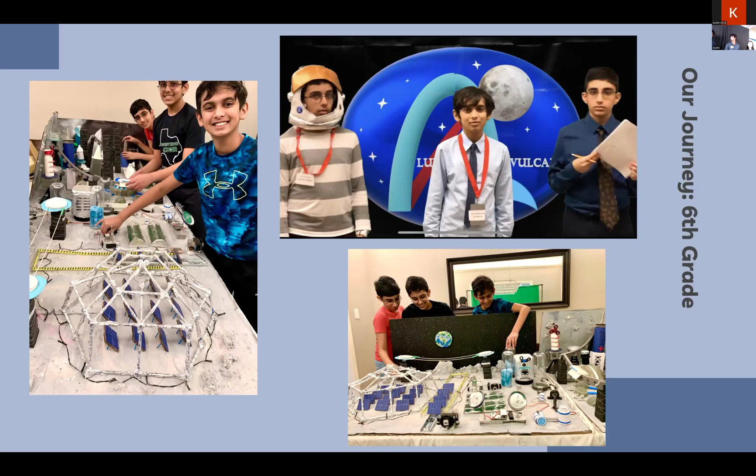When we first heard of the Future City competition, we were excited to realize that the competition involves creativity, engineering, and innovation. Our initial topic was building a futuristic city on the moon, with the project involving creating a project plan, writing a research essay, building a physical model out of recyclable materials, giving an informative presentation and skit on our city, and preparing for a Q&A session.

In our first year as rookies, we made it to nationals and placed 6th. Inspired by our accomplishments in the field of engineering, we continued on for the rest of middle school, working on a variety of topics such as circular economy in 7th grade and climate change in 8th grade.

From our middle school experiences, we learned an immense amount of skills and worked with multiple engineering professionals. Future City taught us about multiple things, including project management, engineering design process, problem solving, as well as helped us develop our research skills, writing skills, public speaking, creativity, innovation, as well as our collaboration and gracious professionalism.

In our 8th grade year, we utilized all of our knowledge and made it to the globals, placing top 5. It was incredible to see and learn from so many teams. Our 8th grade year truly shaped our engineering mindset.

As we were more experienced, we were able to go in depth on topics that really fascinated us, including power generation, energy efficient architecture, food production, health systems, transportation, water desalination, and sewage.

We even followed up that year by giving a TED Talk on climate change, writing in an engineering magazine, and teaching younger teams about our Future City knowledge. As the high school year approached, we were ready to hang our hats up until we realized that a new high school competition was just developed.

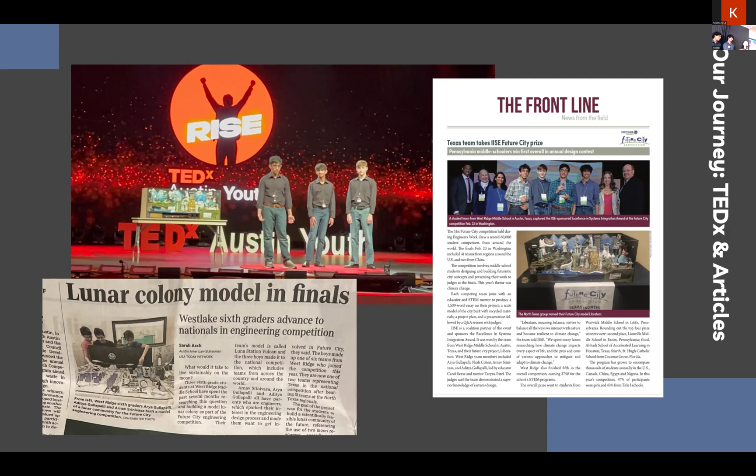Through my middle school years, I also participated in the Future City program, but competing with a different team, and eventually placed in the major competition. This program sparked my passion for engineering and inspired me to explore my interests. I teamed up with Arnav, Aditya, and Arya for the first ever Future City High School program.

We were given the task to research, design, and build the city of the future, but in a completely 3D setting. This past year, our theme was to build a city that runs on sustainable and renewable energy sources and 100% electricity. Our city of Anchor had many futuristic and innovative elements, including a multifaceted program for energy generation with solar panels in space, called the solar system.

This year was a bit different compared to middle school. We were tasked with making a visual VR model showcasing a virtual representation of our city.

One of the biggest challenges we encountered while building the model was that since it was our first year using AR/VR, we didn't have much knowledge about building virtual models, and we didn't have much knowledge about the different platforms that were available.

We had to use problem solving and creative thinking, as well as a structured approach to decide how to formulate our model strategy. We additionally used the engineering design process as a tool to help us come up with our solution. First, we had to identify the problems with different models and come up with a list of certain specifications needed for a successful prototype.

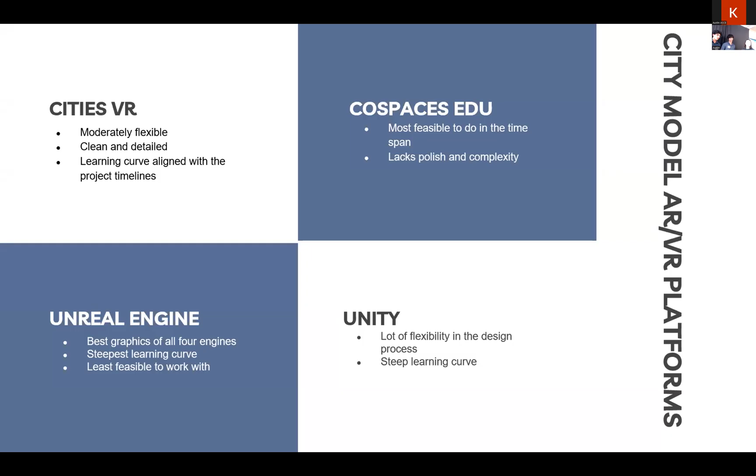We then started to begin designing our model and started with a clean base where we brainstormed our terrain with the goal of encapsulating the idea of our city, which was portrayed in our essay.

We tested out different objects and city structures that could best fit the environment of our location, as well as our electrification solution. After many drafts of testing, improving, and redesigning our city layout, we ended up with the final version.

Yeah, okay. Go on, Shisha.

After tackling the model, our next challenge was the presentation. For this year, we were tasked with displaying our model while giving a 7-minute explanation on the intricacies of our city, followed up by a Q&A session to further detail our city.

We had to record multiple clips using a VR headset and align them with our presentation script. This was also an iterative process of testing, improving, and redesigning.

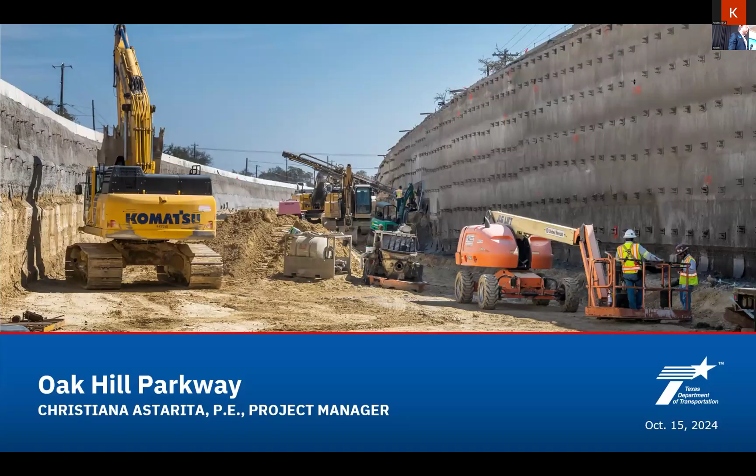In fact, if you go downtown, particularly East Austin, you can look at some of the manholes and the cast iron median covers will actually say Austin Concrete Works. So we have a rich history in Austin and are very proud of the product we've produced over those years. Concrete pipe lasts a long time. I know we're giving a presentation here in a few minutes regarding TxDOT and one of their projects. Our industry has a very rich tradition of partnering with TxDOT. Very proud of all the various projects we've been associated with. Probably the biggest one I've been associated with was 130. That was a very interesting project.

The most unique was the 290 I-35 South Austin interchange. That was an actual project that had a 15 by 15 box culvert that was cast in place. TxDOT didn't believe that you could do a precast 15 by 15 box culvert. Back at the time we were Hanson. We got asked, hey, is this something you could do? We took a look at it, actually made a precast 15 by 15 box culvert, and shaved 3 weeks off their construction project for Martin K. Eby. It was a huge success for TxDOT, huge success for us, huge success for Martin K. Eby. My claim to fame was because of that project, I actually helped get an article written in Engineering News Record, so I'll be signing autographs.

And again, on a personal note, all through my career I've been involved with the Austin branch ASCE. I was involved at the University of Texas and learned about civil engineering for the first time. Back when I started with the Austin branch, man, if we had 2 nickels to rub together, we were rich at the time. And if we had 30 people at a meeting, that was huge.

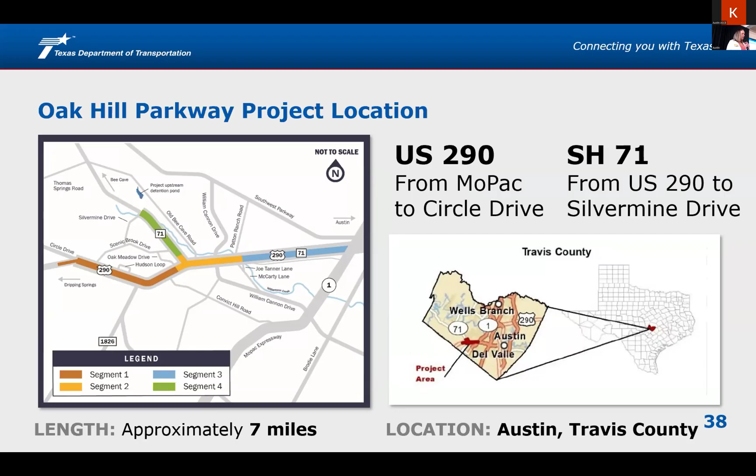The Oak Hill Parkway project is located in Southwest Austin and Travis County. It spans US 290 from Loop 1, or MOPAC, at the east end to Circle Drive at the west end. It also includes SH-71 from US 290 to Silvermine Drive, or Fletcher Lane. Altogether, this project is approximately 7 miles in length.

This project includes approximately 6 miles of roadway improvements along US 290 and 1 mile along SH-71, which includes fully reconstructing the Y interchange and adding 2 new flyovers to connect US 290 and SH-71 in both the eastbound and westbound directions, extending the existing frontage roads, widening the existing US 290 main lanes, building a new overpass for the US 290 main lanes at William Cannon, and reconstructing US 290 main lanes below existing ground level, beginning just east of SH-71, all the way to Circle Drive Southview.

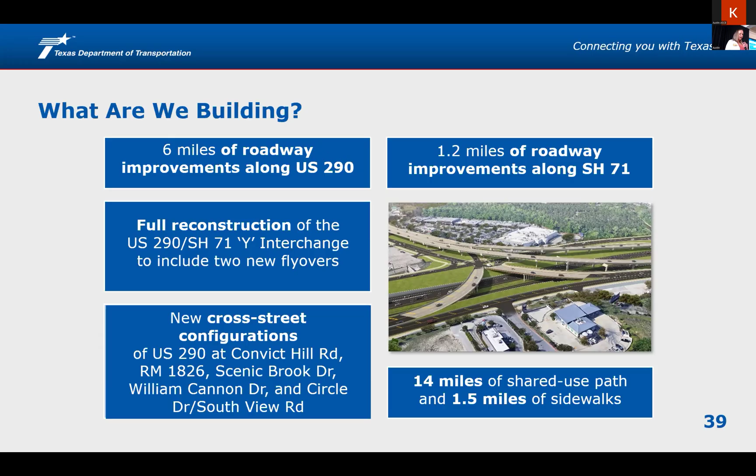We'll also be reconfiguring the cross streets west of SH-71 along US 290 at Convict Hill, RM 1826, Scenic Brook, and Circle Drive or Southview to include grade separated interchanges. Plus we are adding new U-turns along US 290 and SH-71, an off-site stormwater detention pond and dam upstream of Williamson Creek, numerous water quality treatment ponds to treat stormwater runoff, and 14 miles of shared use path and 1.5 miles of sidewalk.

The SUPs, as we call them, shared use paths, will connect with those already built along MOPAC, so that bicyclists and pedestrians will be able to travel from Circle Drive all the way to Barton Springs, Lady Bird Lake, and beyond.

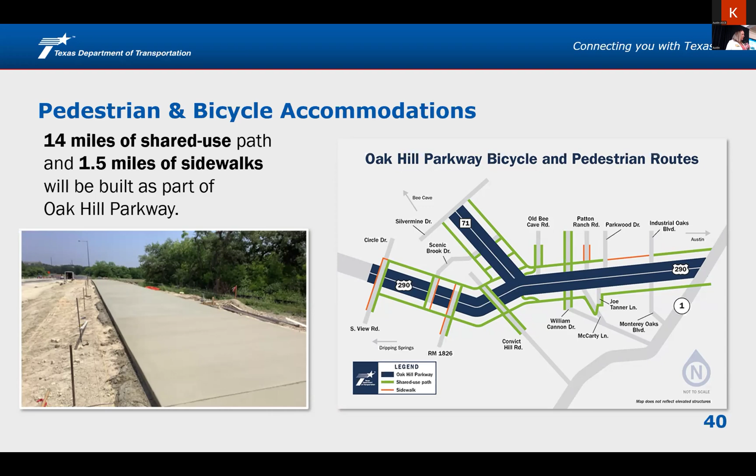Just to give you a little bit of project history, this project is over 30 years in the making. In the early 1980s, the need for a roadway project at the Y in Oak Hill was researched. The original design from the 80s covered US 290 from RM 1826, which is within the current project limits, all the way to FM 973 near the airport. The section between Joe Tanner Lane and Riverside Drive was constructed. However, the portion that makes up the current project was halted due to a combination of funding issues, environmental concerns, state and federal species listing, adjacent land use changes, and especially public input.

During this time, discussions and redesigns were taking place to address the concerns with the project that TxDOT was proposing. TxDOT converted the intersections of US 290 and SH-71, and US 290 and William Cannon Drive, to continuous flow intersections, or CFIs, to improve traffic throughput in the area. The big gap between the DEIS and FEIS is due to folks trying to slow down the project and the need for TxDOT to evaluate different designs.

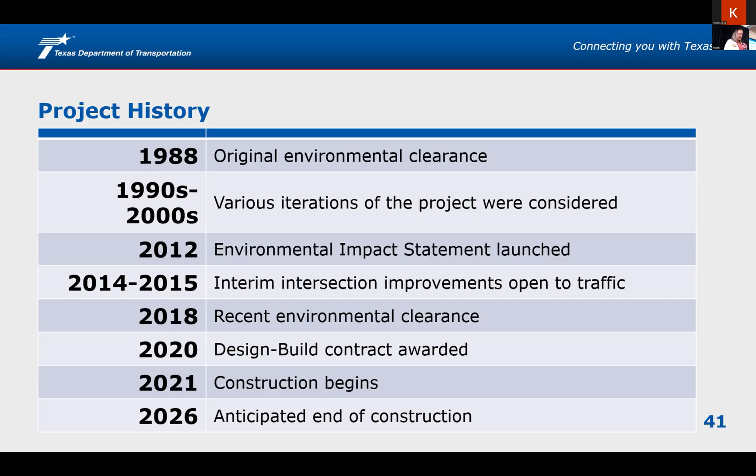And then finally, a design was created that satisfied the majority of concerns, and construction was able to move forward. Construction is anticipated to be completed in mid-2026. Substantial completion date is May of 2026.

The population of Travis County has increased roadway congestion, which has caused a decreased level of service and increase in travel time throughout the US 290 SH-71 corridor. The US 290 SH-71 corridor reached its capacity back in 1995, and the Texas Clear Lanes Initiative exists to address gridlock for Texas drivers statewide, and the Oak Hill Parkway project has been included as a critical project to address congestion.

The Oak Hill Parkway project is, like Austin mentioned, a design build project, and this slide shows you who TxDOT has partnered with. Atkins Realis is our general engineering consultant, or GEC, and they assist TxDOT, myself, and my deputy project manager in the design and construction management oversight of the project.

Atlas, formerly Pavtex, is our owner verification, testing, and inspection firm that performs material sampling, testing, and inspection oversight. Our design build contractor is Colorado River Constructors, or CRC for short. It's a joint venture comprised of two very experienced design build firms: Fluor Enterprises and Balfour Beatty Infrastructure. AECOM is the design engineering firm they contracted for the design. As you can tell, if you've driven out that way, we're quite past the design phase. We're well into construction, over halfway through now. And lastly, Robert Kistner performs independent quality assurance and works on behalf of both TxDOT and the contractor.

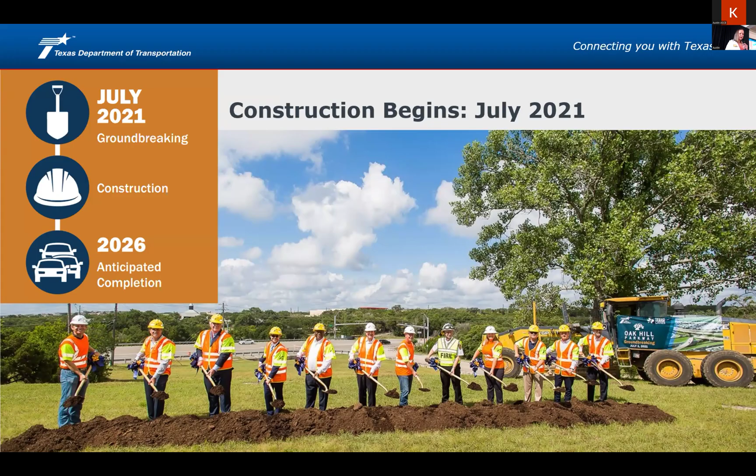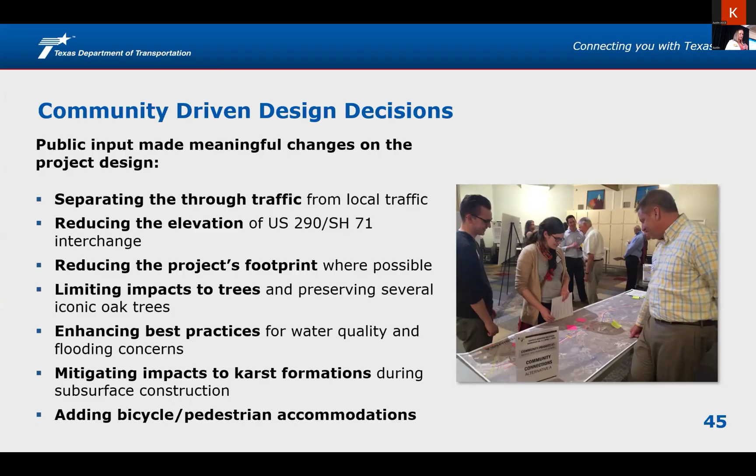The original design of the Oak Hill Parkway project changed from a typical freeway design to what is currently being constructed. Public input provided meaningful changes to the project design, such as separation of through traffic from local traffic, reducing the elevation of the US 290/SH 71 interchange, reducing the project's footprint where possible, limiting impacts to trees and preserving several iconic oaks, enhancing best practices for water quality and flooding concerns, mitigating impacts to karst formations during subsurface construction, and of course adding bicycle and pedestrian accommodations.

Now let's look at some of the features of this project that make it so interesting.

So here you can see a nice list. CRC is responsible for protecting and preserving a specific group of iconic trees near the William Cannon intersection, as well as multiple trees in what TxDOT identified as tree preservation areas. In addition, we got the contractor to commit to preserving additional trees that were not going to be in conflict with their final design.

The project boundaries include portions of the Edwards Aquifer contributing zone and recharge zone. It's a very unique area. This means karst features are present, and this requires TCEQ coordination to mitigate those voids in the limestone.

We have Williamson Creek, which crosses the project in four locations: at SH 71, Old Bee Caves Road, William Cannon, and US 290. With the completion of our project, Williamson Creek will run parallel to and in between the US 290 eastbound and westbound main lanes in that area from SH 71 to William Cannon.

TxDOT also acquired all right-of-way rather than turning it over to the contractor, as was typically done in design build projects. We decided to take on this risk ourselves, and we had possession of all new parcels months ahead of construction.

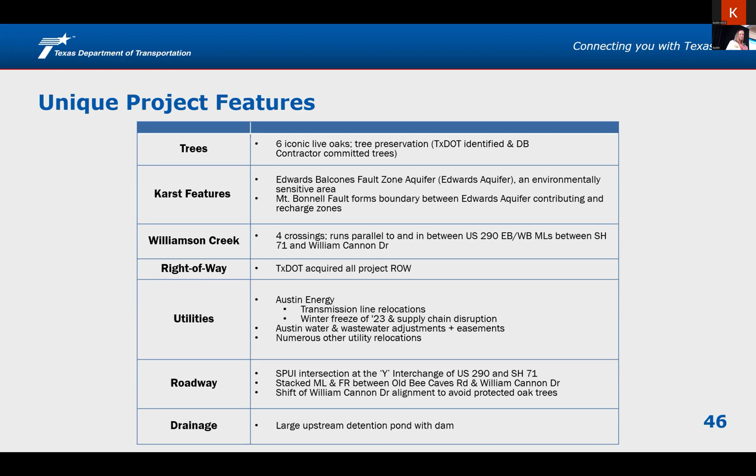Flooding storage will be provided at a large upstream, offsite detention pond. I'm told it's only TxDOT's second dam added to their system, so it's a pretty cool feature.

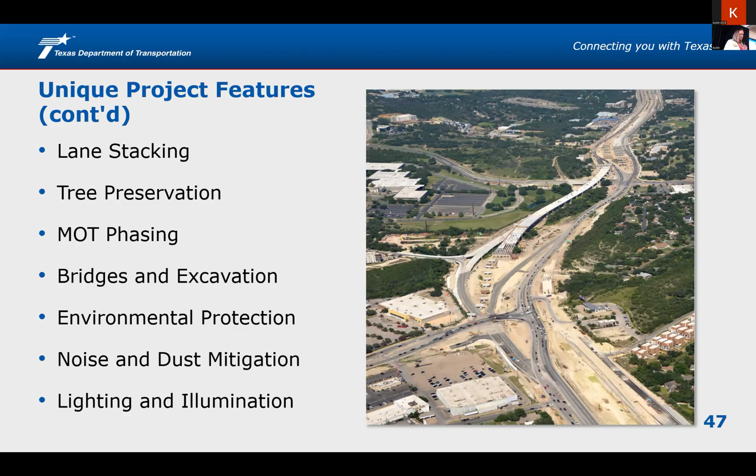Here are some additional project features, and I'll touch on some of the concerns from the past and how they were addressed. You can see we've got lane stacking, tree preservation, maintenance of traffic phasing, lots of bridges and excavation, environmental protection, and noise and dust mitigation is huge—keeping the public happy—along with lighting and illumination.

Lane stacking was used to reduce the footprint of the roadway between William Cannon and Old Bee Caves Road by stacking the main lanes and frontage road. In this stretch, the available width is restricted by the cliff face to the south, Williamson Creek in the middle, and private property, the NXP facility, to the north, which also has a pond bordering the area.

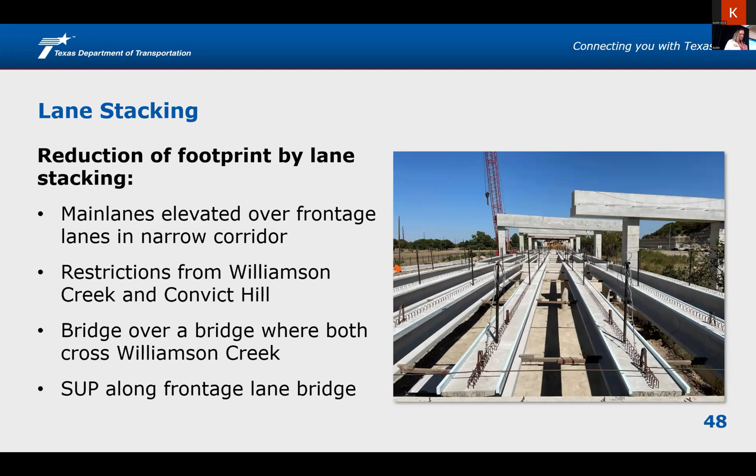We intend to preserve the oaks in Oak Hill, including the iconic oaks, through tree preservation areas designed into the construction plans. Over 300 trees are being maintained on the project. A dedicated staff arborist has been active during construction since procurement, allowing awareness and a relationship with the trees in our corridor and providing a better rate of success with conservation efforts. There are some pretty steep liquidated damages associated with those iconic trees.

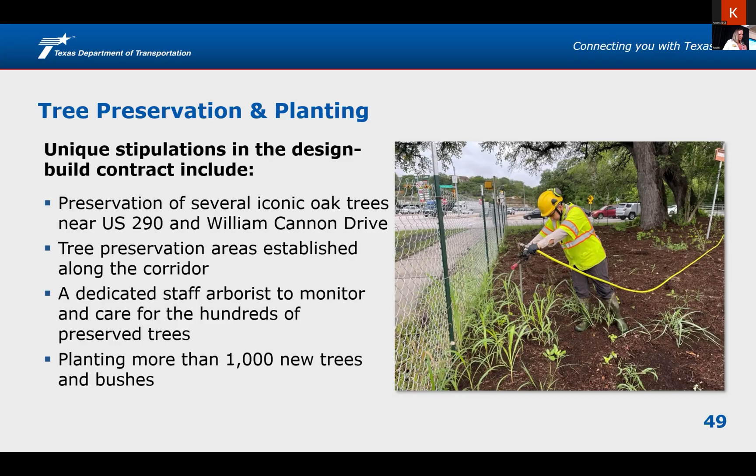There are 6 iconic trees near William Cannon that have been incorporated into the design, and they've been given names by the community. The 3 Nieces are right at William Cannon, along with the Grandmother, the Grandfather, and the Beckett Grove Oak, also known as the Taco Bell tree, which was relocated from across the corner where a Taco Bell used to be.

These trees were identified early on to allow the team to consider how best to construct the project around them, such as the distance needed to preserve their canopies and root systems. In the case of William Cannon, we shifted the roadway around the trees instead of removing them.

Roll plots have traditionally been hard to use in the field, having to roll up the printed versions and hope they don't blow away. With the incorporation of iPads and other digital viewing devices, viewing larger sheets is easier out in the field.

Layering of phased construction in digital files, such as with the traffic control plan, allows for faster comparative evaluation of the phases, which can lead to schedule gains. There's also less chance for critical information to be hidden by repetitive information on each separate sheet or obscured by cut lines. Going a step further, the plans can be exported into GIS and viewed on a GIS viewer on a digital device.

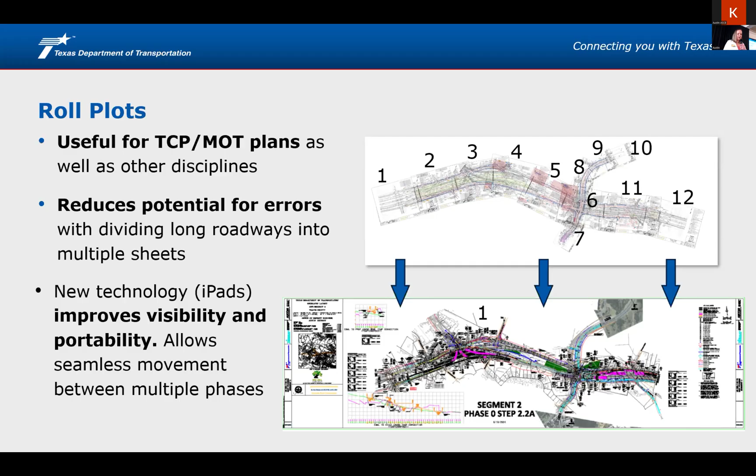Going a little further into TCPs, here's the intersection of US 290 and William Cannon. You can see the iconic oaks indicated in the image here. Now let's see how we move the roadways around them.

One of our mandates for construction is to keep 2 lanes of traffic open in all directions at all the major intersections. Lane shifts and partial closures were used to move traffic around while the roadway transformed from its original configuration into the current configuration. We've done this successfully by using detailed TCPs for each phase of construction.

These are also referred to as maintenance of traffic, or MOT, sheets. In this image, and a view to follow, the green lanes indicate new roadway and pink indicates new bridge work, in this case the new William Cannon Bridge and future 290 westbound main lane bridge. So we started by working around the existing roadways.

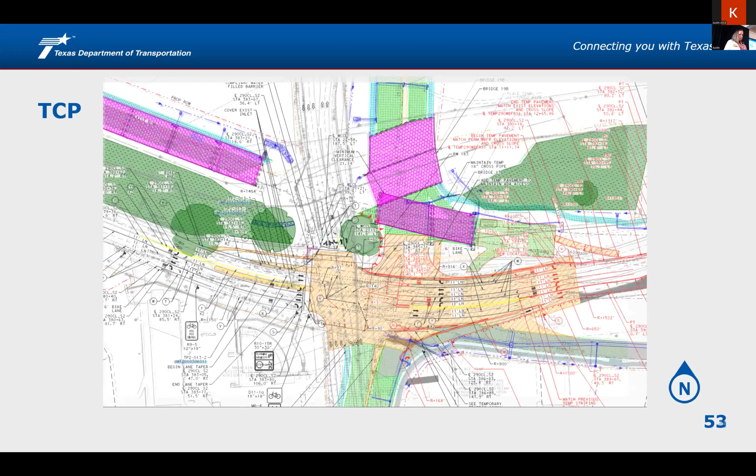Here the orange shows temporary pavement we used to build up the intersection prior to shifting onto the new alignment. Once the new alignment was ready, we shifted traffic onto the newly constructed roadway and began demolition of the old alignment. The switch allowed us to build the rest of the bridge work while allowing traffic to flow.

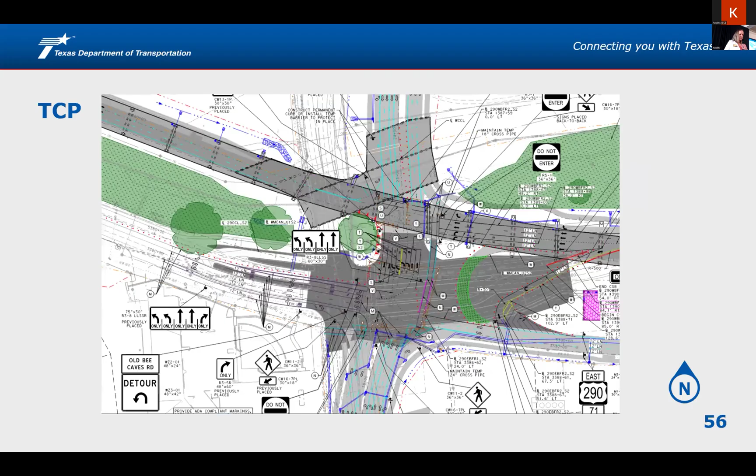The eastbound main lane bridge still needs to be constructed to the south, but you can see all the different phases we have to go through to move traffic around in order to build the project. If you'd like to see the physical representation of the plans we just looked at, here are those same steps seen from above, showing the progression from December 2022 all the way to just a couple of months ago.

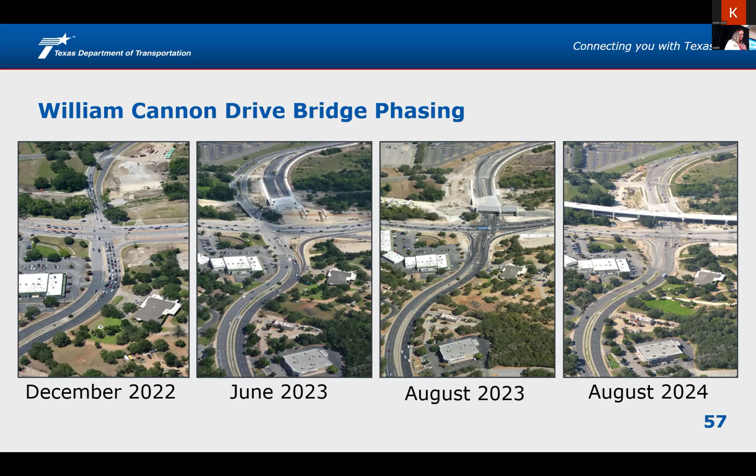So 26 bridges on the project. On the east side of the project, there are bridge widenings of US 290 over existing crossings at Old Fredericksburg Road or Harper Park Drive and Monterey Oaks, Industrial Oaks Boulevard. And that's to increase highway capacity for everything we're adding to the west.

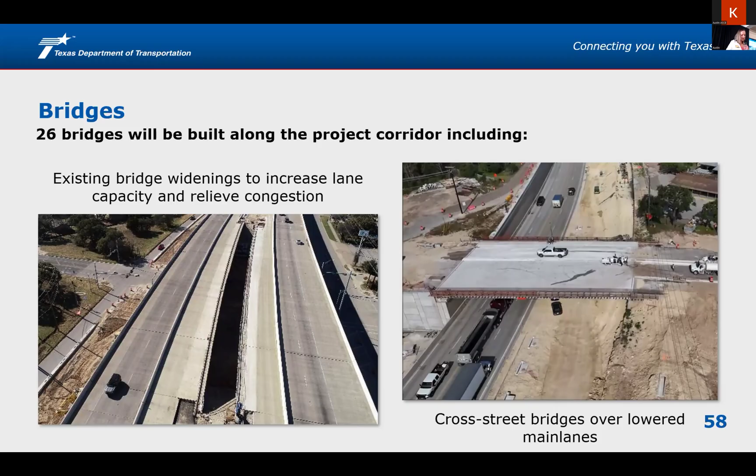And then on the west side of our project, we have bridges for the cross streets that used to be signalized intersections with US 290. So the picture on the left is at the east end of the project, bridge widening, and the picture on the right is at the very west end of the project.

In the center of our project, we have unique bridge configurations for westbound US 290 frontage road at William Cannon, like I've already kind of spoken about. Also at Old Bee Caves Road, and then there's bridges over these bridges for the westbound US 290 main lanes.

So on the left, like I mentioned earlier, this is the new westbound frontage road that opened up a few months ago. And what's on top is going to be that new westbound main lanes going over top. Something similar will be on for eastbound traffic on the south side of Williamson Creek, not as long of a distance, but you'll still have this effect.

And then on the right, the construction crews performed a triple crane pick during construction for the main lanes bridge, using 3 cranes in unison to lift that really heavy rebar cage into place.

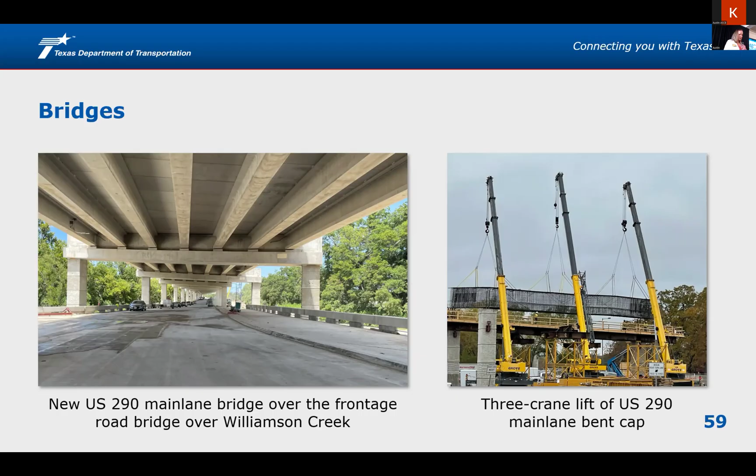There's been a lot of wall construction, especially as of lately now with a lot of utilities moved out of the way. Every type from retaining wall to support the new lowered main lanes and frontage roads to sound walls, which help mitigate noise for the neighborhoods along US 290. Some walls are built out by our crews, others are prefabricated elsewhere and installed on site. Retaining walls are used throughout the project when we need to either raise or lower the roadway.

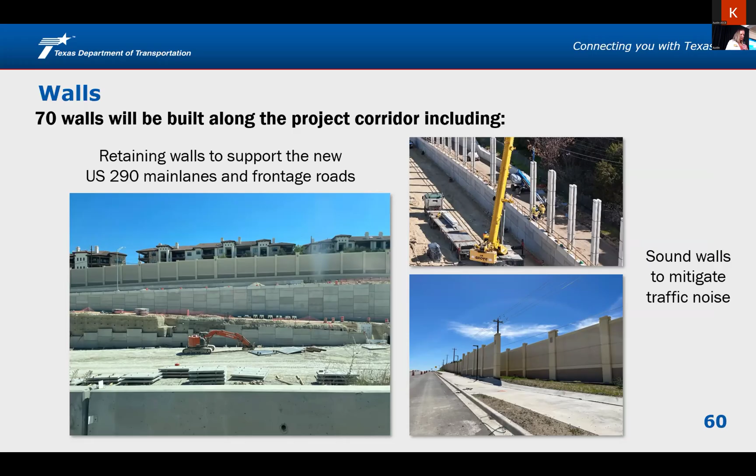So the photo on the left-hand side is right outside the project office, and there's several walls here. You can see the sound wall at the very top in front of those apartment buildings. Then we got a cast-in-place wall, a soil nail wall, and this is going to be a ramp here, going up to meet the new crossover bridges at 71, the interchange. And you can see the crews, how they install those sound wall panels.

The US 290 main lanes on the east side of the corridor transition from an elevated highway with bridges to a lowered one under the cross street bridges to the west. We are using large milling machines to remove 2 million cubic yards of material to excavate for those lowered main lanes. Just a fun fact, if we stack that on a city block in downtown Austin, we would have a 60-story tower of stone. So it's an enormous amount of earth movement.

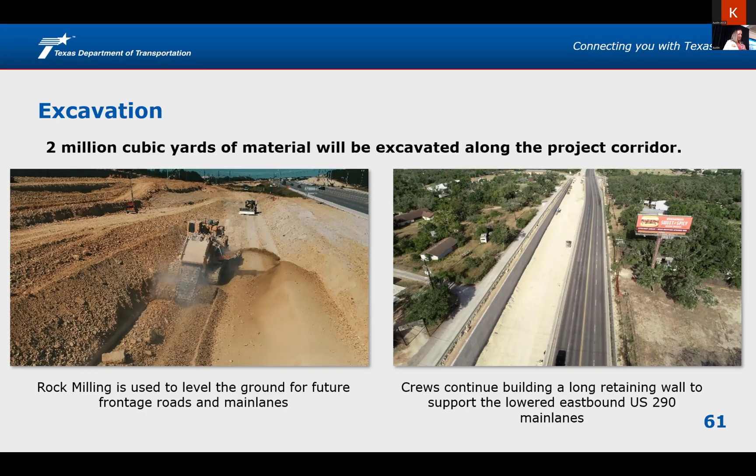So why are we elevating US 290 in the east and lowering it in the west? Well, no pun intended, it's Balcones fault. The fault line runs along the border of the recharge and contributing zones of the Edwards Aquifer. We are excavating in the contributing zone, which is comprised of hardened rock layers, and precipitation sheet flows over the surface. Near the fault line, rainwater enters the recharge zone where it rapidly drains into the aquifer, which is why we are keeping as much roadway structure above ground as possible.

In that recharge zone, there are karst formations, which are one of the key environmental concerns organizations like Save Our Springs Coalition had about the original project. The Edwards Aquifer is an environmentally sensitive area that supplies drinking water to residents of the area, and is also home to endangered species like the blind salamander.

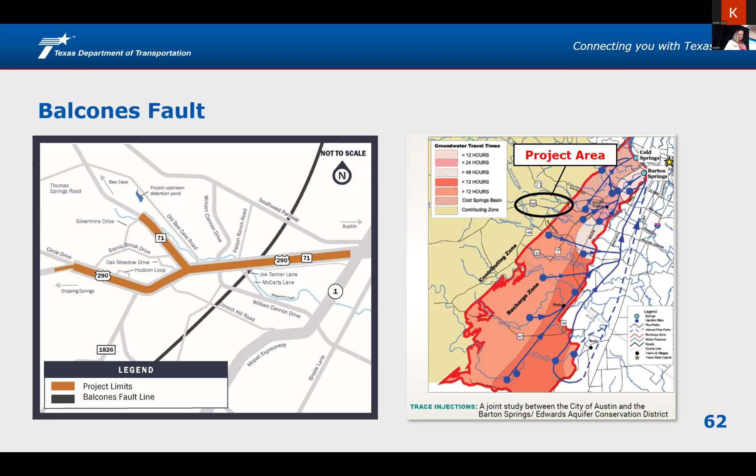The milling machine—we have, I think, four of these milling machines on site, and they're just going nonstop. Really pretty cool to see up close. And they go really slow, but they turn out a lot of cutting through the rock.

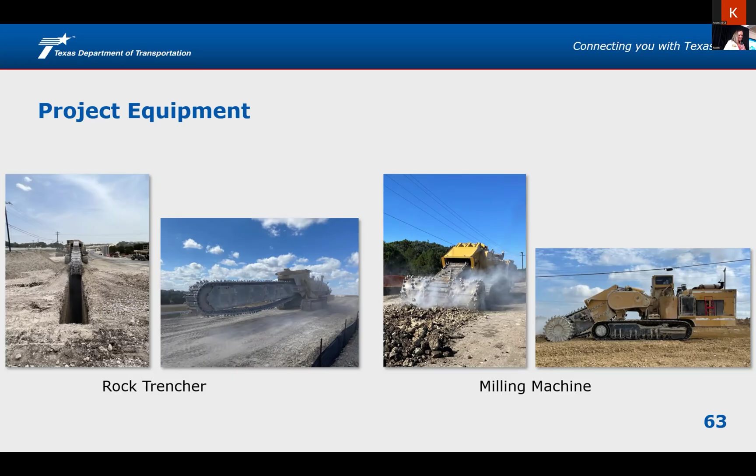Just wanted to highlight this - this is a big part of the project. So even though we are staying above ground with the roadway, we still have to install the substructures required to build the road and bridges.

To mitigate concerns of working in areas with karstic features, a procedure was developed in coordination with TCEQ for the Oak Hill Parkway project. All excavations and drilled shafts in the recharge zone are checked for karst features visually or using cameras. Whenever a karstic feature is discovered, work is halted. A project geologist is notified and comes out to the site, and TCEQ is also notified if environmental mitigation is required.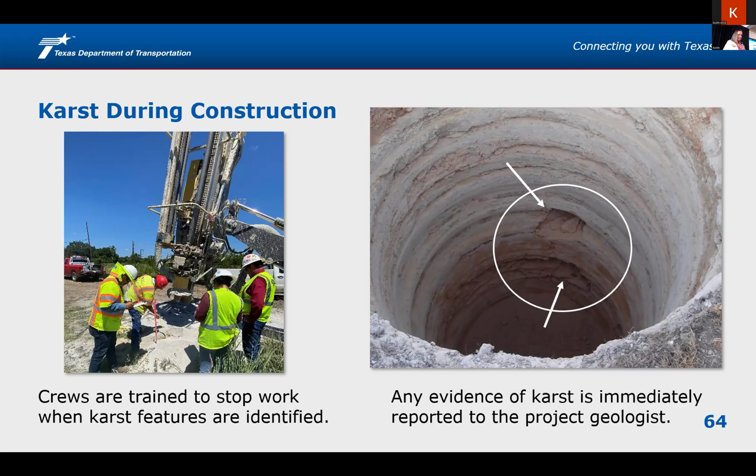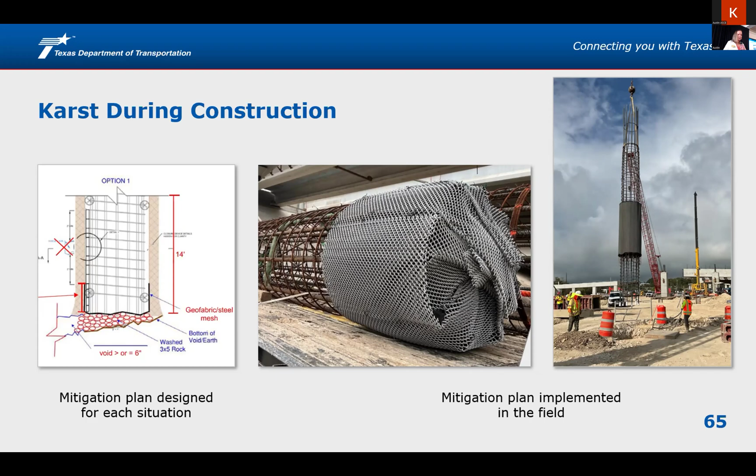Some information about Williamson Creek. It flows through the project with 4 major crossings, like I mentioned before. The proximity to the highway has posed risks in the past, specifically at the low water crossings. There used to be 2 at Old Bee Caves - that was the more concerning one for the City of Austin - and then there was one at Joe Tanner.

The Oak Hill Parkway project is raising all of US 290 and SH 71 out of the floodplains that were determined by the Atlas 14 evaluations. There are 8 water quality ponds in the project designed to exceed TCEQ and Edwards Aquifer requirements, and 6 of those are actually in a TCEQ pilot study for sand filtration and biofiltration.

Lastly, riparian work is planned along the creek near the end of the project. In areas where we've had to excavate for overbank mitigation, we'll be planting back plants, shrubs, and trees that will be able to withstand future flooding. Until then, best management practices are installed in and along the creek to prevent suspended solids from the project from impacting the creek.

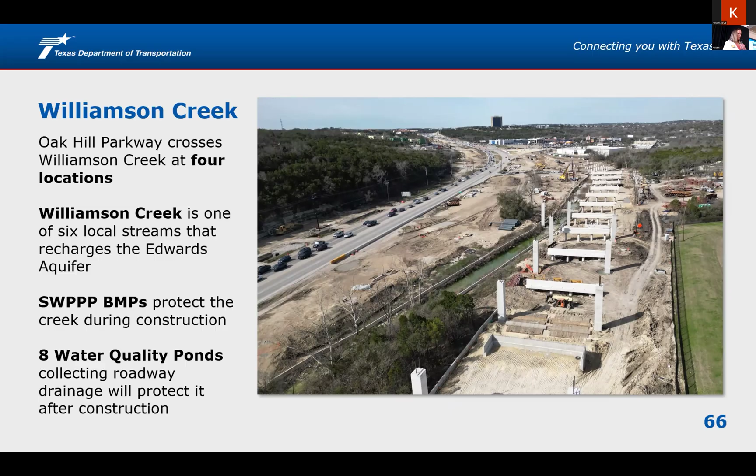So in the picture you can see the creek in the middle, and there's a line of concrete barrier - I'll show you on the next slide. This is a best management practice system used on this project, called linear creek protection. We've used this to channelize the creek and create a hard barrier between it and the work. The combination of concrete barrier, silt logs, and fencing has been pretty successful. You can see the detail there too.

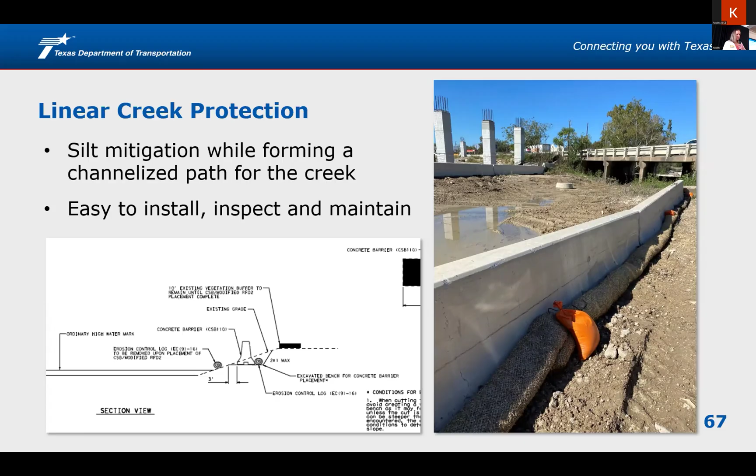Flood concerns from Williamson Creek have been a public concern for a while. Some new data about rainfall in the state, with the adoption of Atlas 14, necessitated a restudy just prior to the design phase of this project. This was significant to verify we would protect the public from flooding.

One flood mitigation strategy we are employing is the construction of one of the first dams for TxDOT, like I mentioned. It's a little hard to see - you can see up at the top middle of that aerial imagery. TxDOT has acquired the land as part of a drainage easement for that offsite detention pond. Towards, I wish I could trace this out - you can see the yellow, green, red colors down below. That's the area where the dam is going to be built downstream. We worked closely with the City of Austin to design and plan maintenance of the dam.

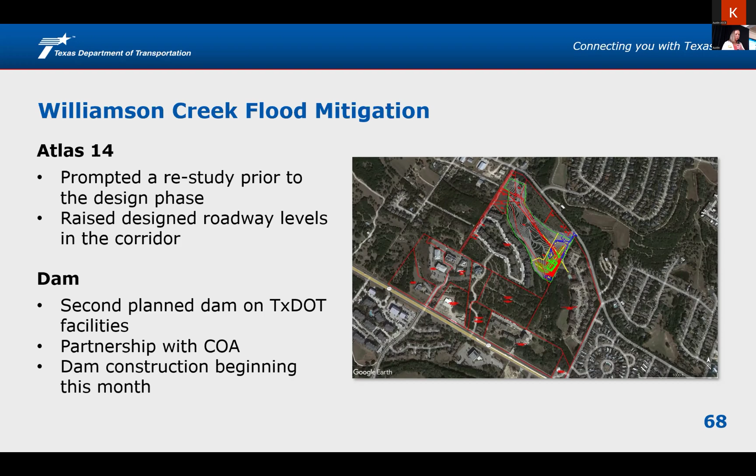It is located away from the main roadway, off of Old Bee Cave Road and Fletcher. The purpose is flood control and reduction of potential impacts to the project. We are also raising the roadway at the old low water crossing, so the driving public will avoid the potential risk.

Here is a picture, plan view of that offsite detention pond. I wanted to grab a better picture to show you where the dam was going, but I couldn't access the system to pull the drawing. Flood storage will be provided at a large upstream offsite detention pond off Old Bee Caves Road, to ensure the project does not result in flooding impacts. The dam is to be constructed where you see that little lake coming off Old Bee Cave Road up at the top.

It's L-shaped in that configuration.

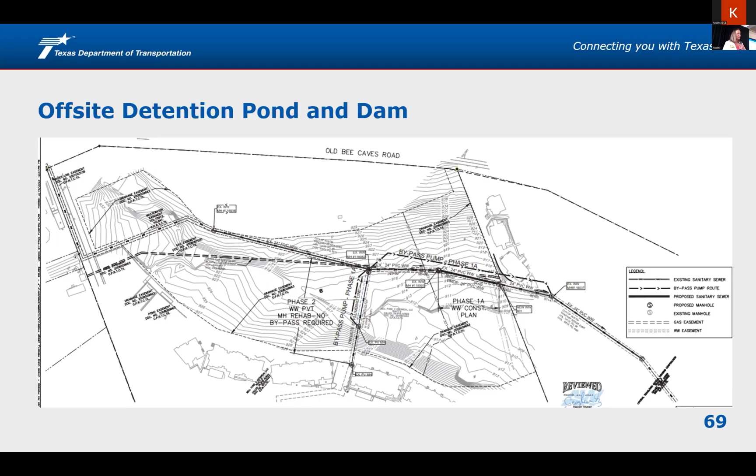With this work, we're having to do some wastewater relocation. We found out just prior to bids being due that there was an existing Austin Water wastewater line that runs right through the middle of our dam. So CRC is having to address that ahead of the dam construction.

The project includes 3 sound walls to mitigate noise to local residents. During construction, we require construction vehicles to use white noise backup alarm systems at nighttime hours. Also for controlling air pollution, CRC uses water trucks to mitigate dust, and they've even gone above and beyond this requirement, utilizing air quality monitors mounted around their concrete batch plant, located within the TxDOT right of way in the middle of what will be the future main lanes west of FM 1826.

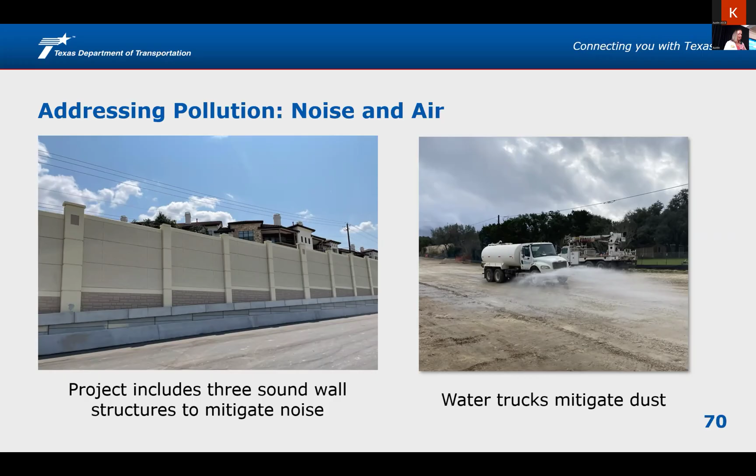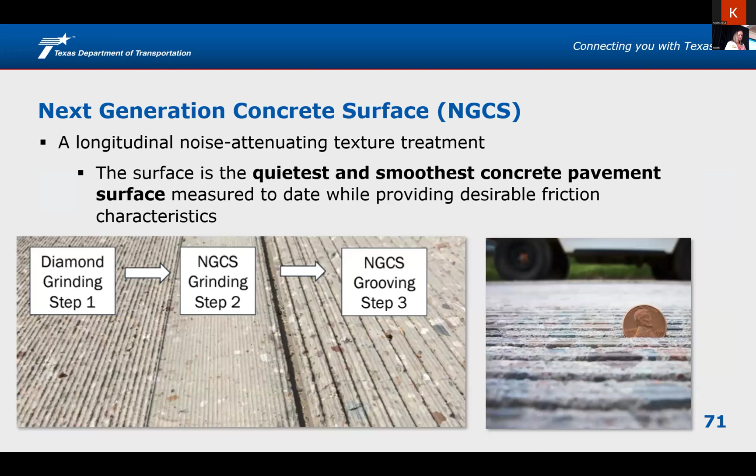Some other interesting features of the project: this next generation concrete surface is being incorporated into the final concrete pavement surface. This utilizes conventional diamond grinding to establish a controlled uniform profile. It'll provide a smoother and quieter ride, and I'm told it reduces noise by 6 to 7 decibels.

Asphalt pavement is being recycled for use on other roadways. This reclaimed crushed material offers the same durability as pavements constructed with 100% virgin materials, while saving energy and diverting waste from landfills. According to the USDOT Federal Highway Administration, more than 81% is put back into highway use. There's also an on-site concrete batch plant as well as an asphalt plant utilized close to the project, which reduces truck trips, therefore reducing emissions and increasing roadway safety.

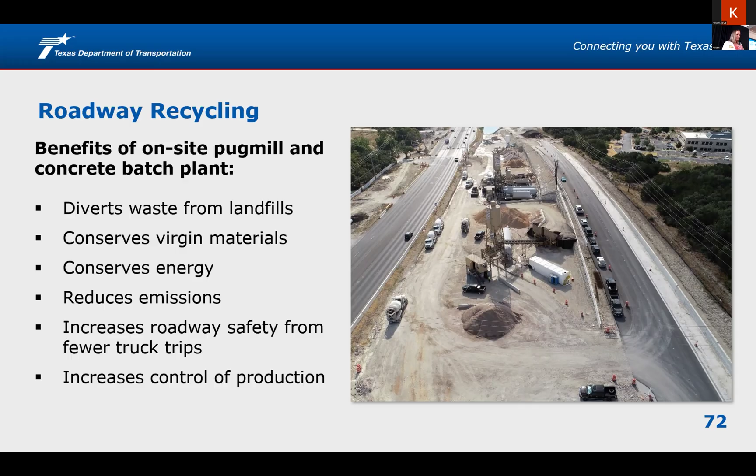The roadway luminaires have a zero upward light rating. Our design aims at lighting the pathways and nothing else. There is no high mast lighting in the corridor beyond where it already exists at the Mopac intersection, but we've installed quite a bit of lighting from the east end to William Cannon. There has been a strong desire from the Oak Hill community to prevent light pollution as much as possible.

We had many community members contact the project to request TxDOT follow dark sky initiatives. The community wants lights closer to the amber lights from traditional high pressure sodium light bulbs, similar to what existed over at the Mopac intersection, and further east was more of a yellow amber hue. We found that we can accommodate a change while maintaining the illumination requirements for the roadway.

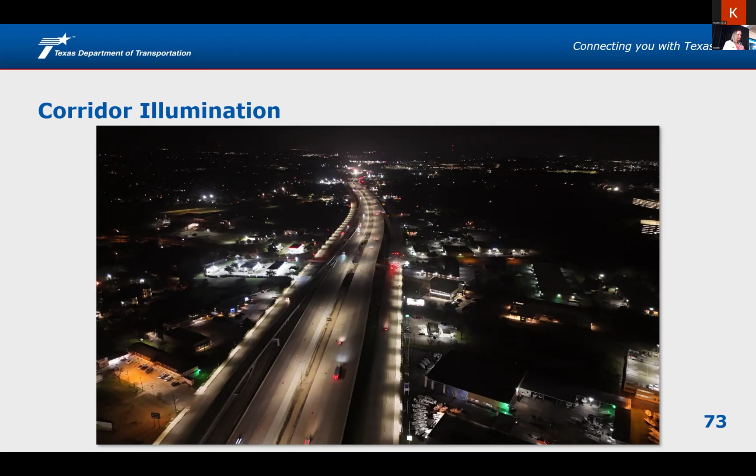So we are going to be implementing a lighting change west of William Cannon, and keep all the lights we've already installed east of there in place. This also shows the lighting was designed with minimal backlighting, same light both day and night, focusing on the paths and minimizing intrusion elsewhere, shielded with a zero upward light rating.

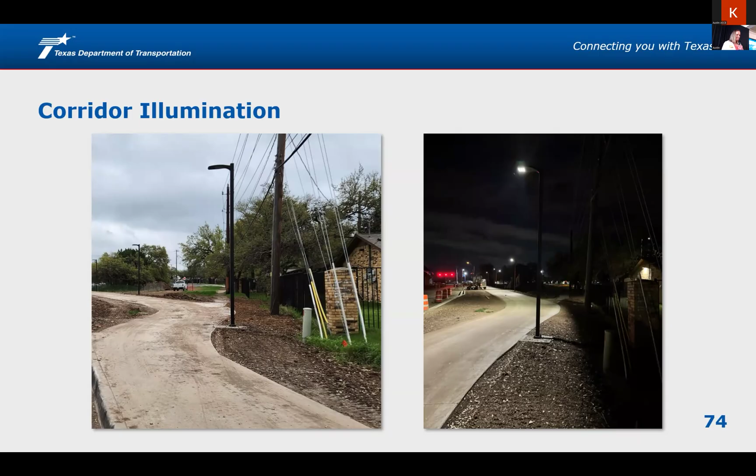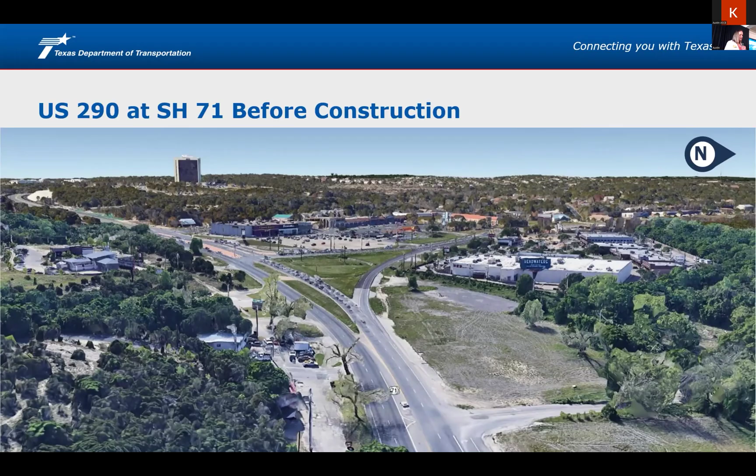I just wanted to share, I think these are always good to show in a presentation, before and after photos. It's kind of eye-opening. This is US 290 at SH 71 before construction, looking towards the west. And here's what it looks like as of a couple of months ago.

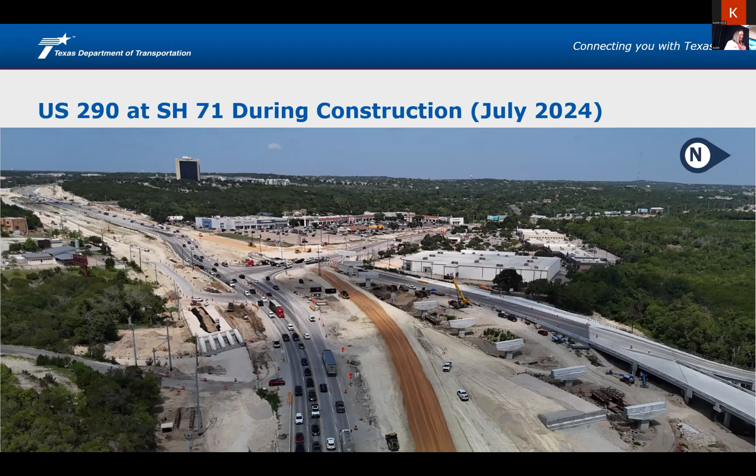You can see the new bridge structure to the right where Old Bee Caves Road is. That'll be the westbound frontage road tying into SH 71. We've got existing traffic still flowing in the old US 290 alignment, heading eastbound, but we've got new eastbound frontage road, bridge structures, pavement, and we're digging a big hole here now. This is also during construction this last month.

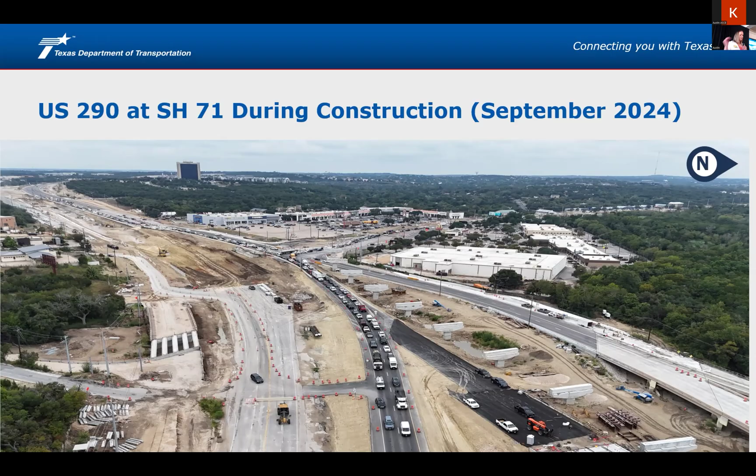There's some new pavement down in the bottom right there. That's where the future westbound main lane traffic will touch down and then go under the US 290/SH 71 intersection, where it's going to be depressed. Similar to what you see at Mopac and 290, we'll have 3 levels: main lanes depressed, cross street bridges for local traffic, and then the flyovers.

And this is our plan for US 290 to SH 71. This has been shown quite a bit at public meetings, also keeping that same perspective, and you can kind of see how things are shaping up.

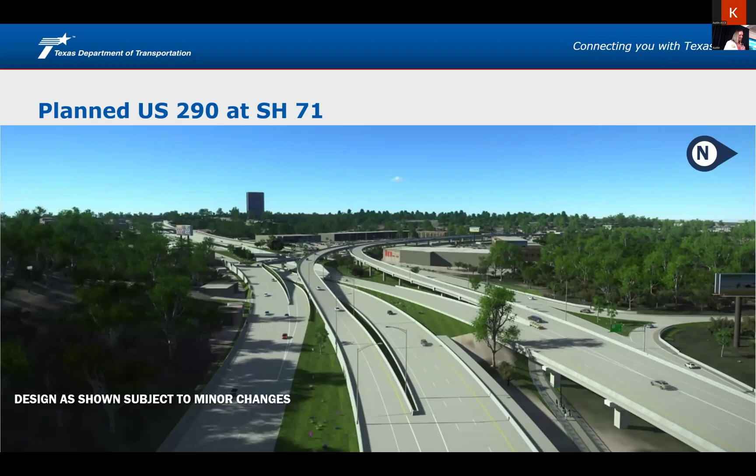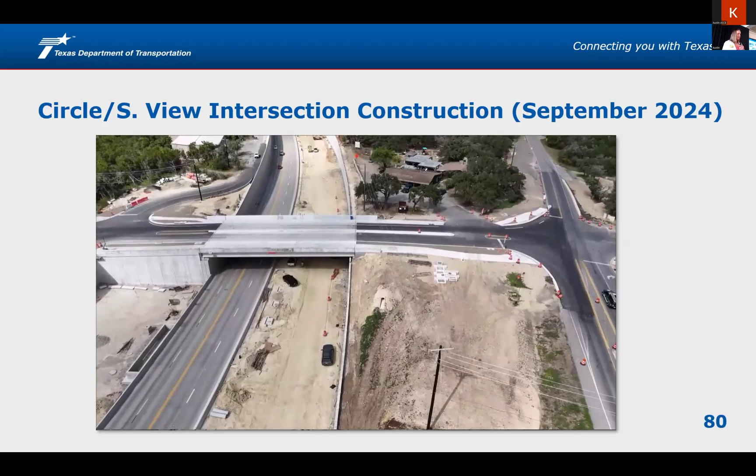Here's a nice rendering - we've got several renderings for the project. Here's the planned intersection of Circle South view, so you can see the new bridge going over the main lanes and frontage roads.

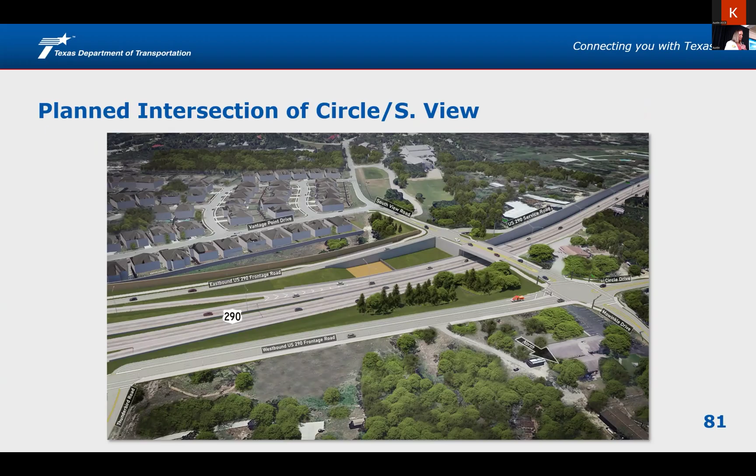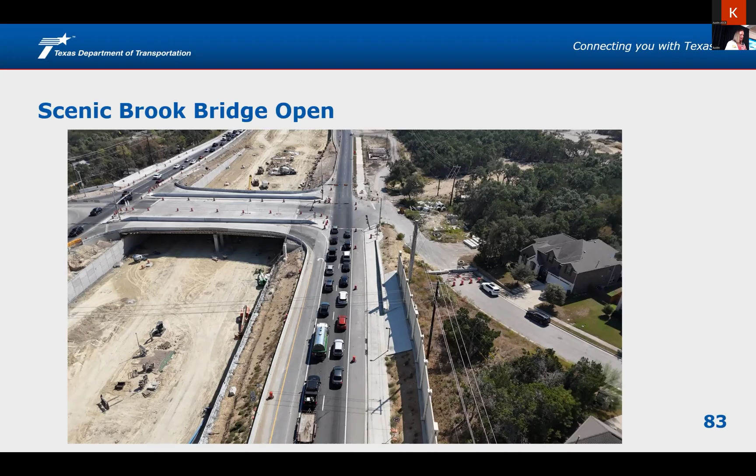Something else that's cool to point out here is drone usage for the project. Aerial imagery is great for websites, public communications, and presentations like this one. Another use is to gather aerial footage that can be included as a layer in a GIS viewer of the project. So for Oak Hill Parkway, the contractor regularly updates the aerial imagery available to their field personnel, and combined with the line data from the design, superintendents and inspectors have an easier time confirming the work on the ground is matching up with the design.

Gathering survey information and calculating quantities of fills or cuts are also improved with drone usage. Photogrammetry allows for 3D models to be created based on images captured by the drones, and volumetric values can be calculated from that data as well.

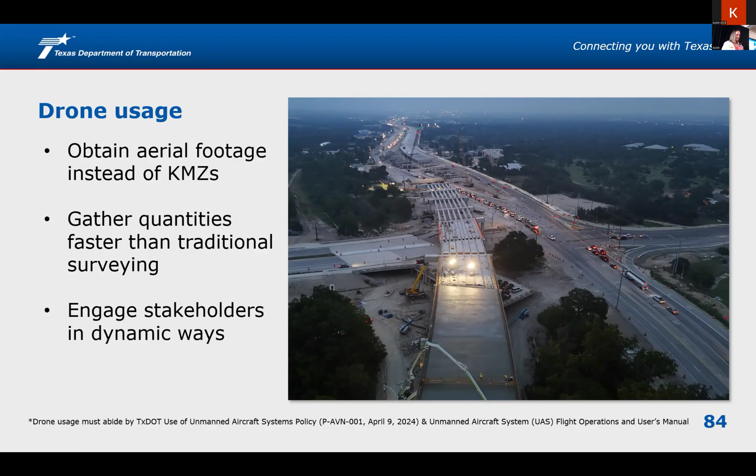And with that, that closes the presentation. Just want to mention lastly, I'd like to point out our project website at the bottom there. It's been our project website since just before procurement, but it's going to be going away as of tomorrow, so if you want to go there, please, by all means, jump on it right away. The reason is we're migrating to a different TxDOT website where you'll still have Oak Hill Parkway information along with other TxDOT projects - they wanted to consolidate all TxDOT projects together. It's been a really unique and good website to have for the public.

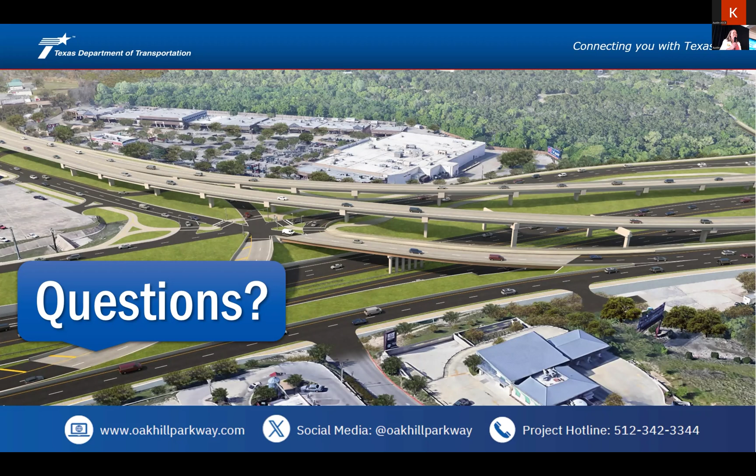Can you briefly describe the pilot program for the water quality farm? I'm not a drainage engineer by any means, but I can get you more information later on it. We could get back together.